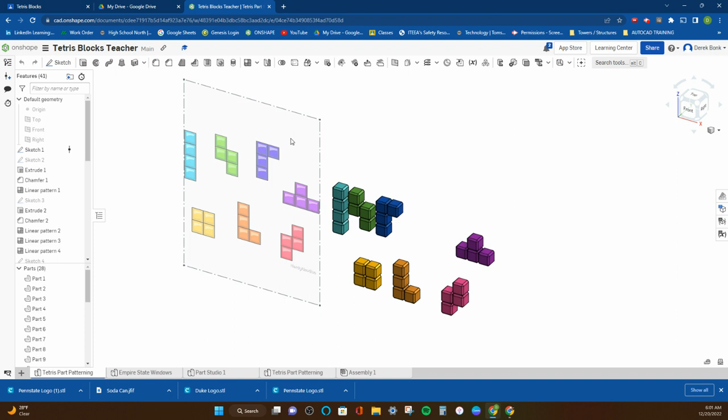Hey, my Ironers. My last couple of videos were all about part patterning. We looked at taking a 3D object and using the 3D patterning tool or part patterning tool to make those parts go at a certain distance and a certain interval or number.

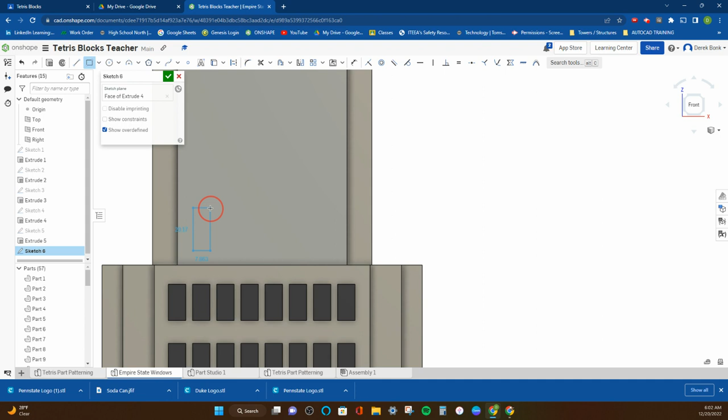The thing I'd like you to consider is going back into something like the Empire State Building and working on sketch patterns. This is another very quick accelerator when it comes to making things happen fast. If I draw one single window, and I'm not getting mathematical about this, I'm just placing something that looks roughly about as I want it.

I can use the linear pattern tool in sketching mode, drag over these or click each line individually, and you can see that there's a control system for multiplying it up and out. And you can grab this arrow, use definitely the arrow. Be careful, don't grab this. If you want to angle things, you can do that. Or grab this, it'll shift it all out of alignment. You don't want to mess with that right now.

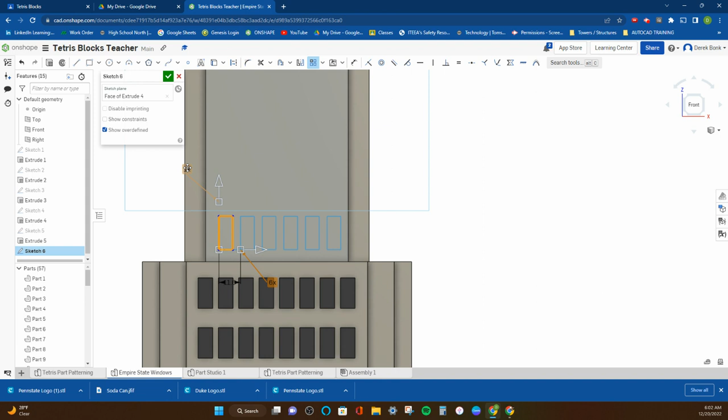But you do want to take a look at this, saying 3 times you can make this something like 6 across and put those where you want them. Click on this 1 times thing and go maybe 6 up in this particular space.

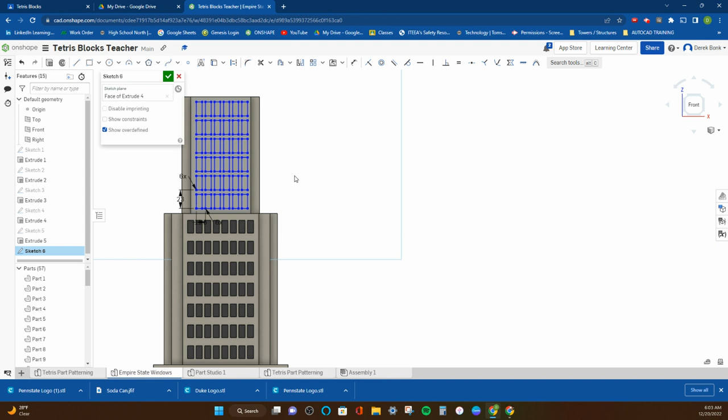This is just roughing something out, not worrying about it mathematically, but seeing the power of using patterns. And if I left click on my mouse, that will finish that process. It gives you a green indicator on the mouse button there to tell you left click one more time to finish that process up.

So you can then extrude, make that something very small, like a millimeter thick, just to give it some object thickness, and then make sure you go to new as the option if you're adding something like windows, that makes them all new parts so you can recolor them.

One thing about finding a list of parts, if you want to control the recoloring of a cluster of parts like this, if you click on the one that you made first, it's going to highlight it, everything that you click. So you click on the first one on that list. And then if you hold shift down, you can click all of those one at a time, or you can hold shift down in between.

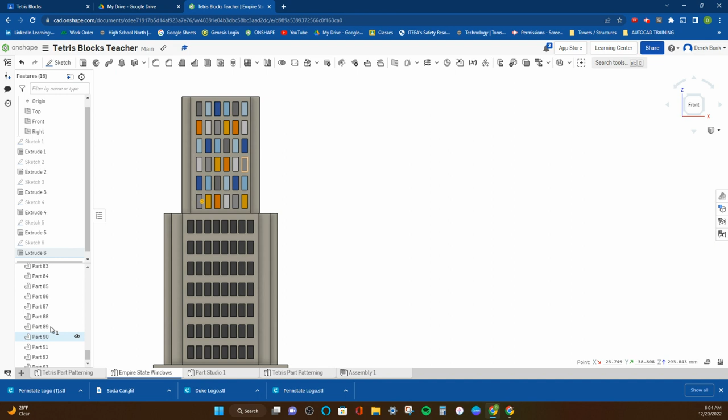Just happened. Yeah, I missed it on the first one. But if you hold shift in between any two selections, it's going to highlight that whole range of anything. That works in a lot of different computer programming. So that's just something you could try if you ever need to select a list of things. You hold shift down in between, and now I can edit the appearance of all of these things in one quick shot.

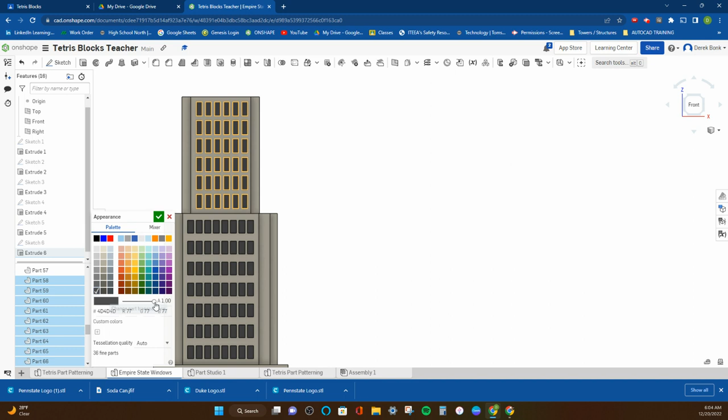You can even change the transparency and make them look a little bit glassy. It almost makes a mirrored finish on things when you do that, if you want to have a little fun.

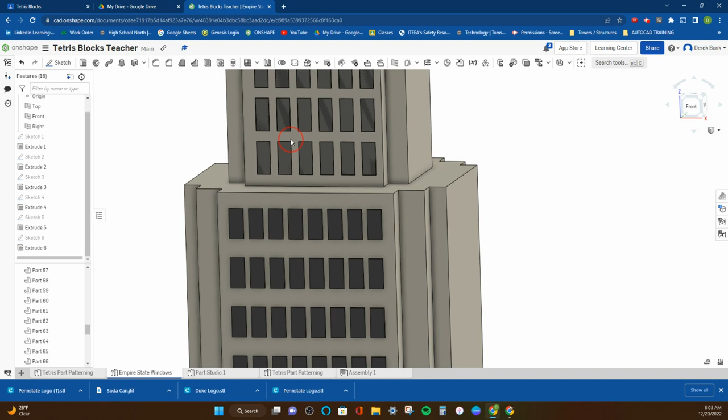But you can really get far fast by using mathematical patterning. So we're patterning geometry in the Tetris project with linear patterns of parts. Now we're patterning just sketches, but this is definitely something that I'd like to see you give a shot. And now that you're a little bit more comfortable with recoloring and recontrolling things, you can even go back into the original sketches and modify things to update the building, make this project a little bit more interesting.